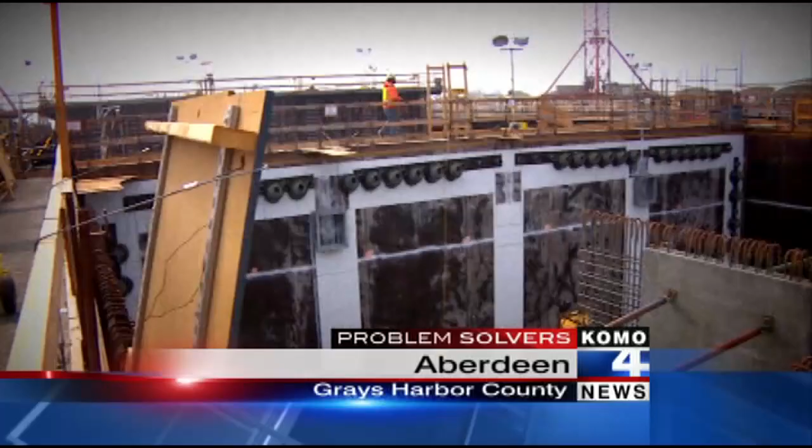Around the world, Western Washington is the acknowledged leader in building floating bridges, from Hood Canal to Interstate 90 to the 520 bridge.

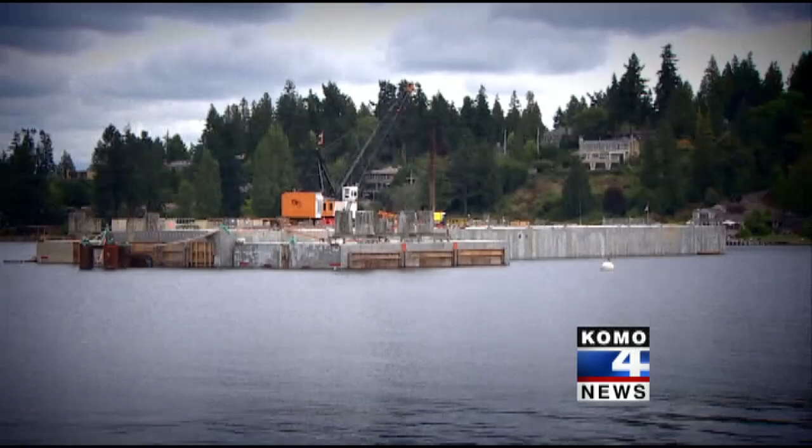And yet the problem solvers have uncovered construction flaws in every single one of the first 6 pontoons built in Aberdeen by Kiewit Construction for the new bridge.

In pontoon after pontoon after pontoon, we uncovered evidence of leaks in dozens of the interior compartments called cells.

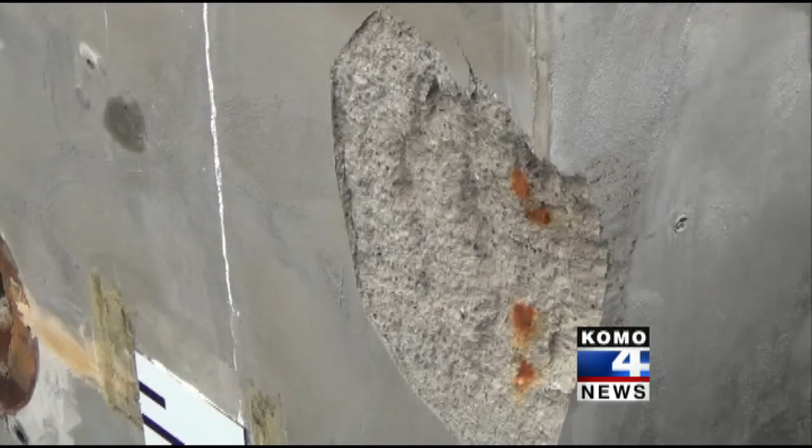The problem solvers uncovered documentation that all 6 of the first pontoons developed extensive cracks while concrete hardened or cured. This drawing, called crack mapping, is of the top and bottom slabs of one of the pontoons. Engineering reports found that the cracking appears to be similar in all 6 pontoons out of Aberdeen.

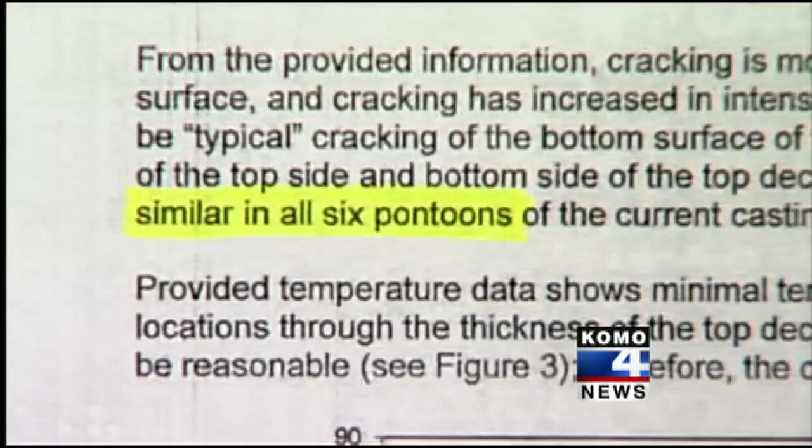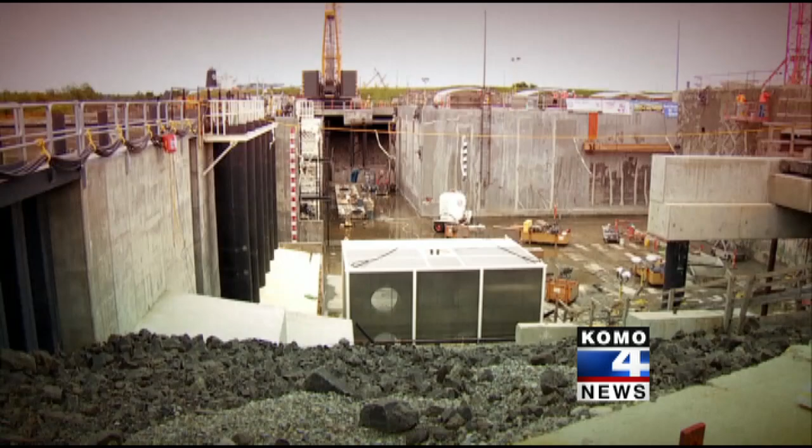John Reilly, the head of WashDOT's expert review panel: Is there any way to know if the cracking, the extensive cracking that we saw in the basin in Aberdeen, is part of why we're seeing the weeping in the lake now? Could be. Could be. It's the most logical connection.

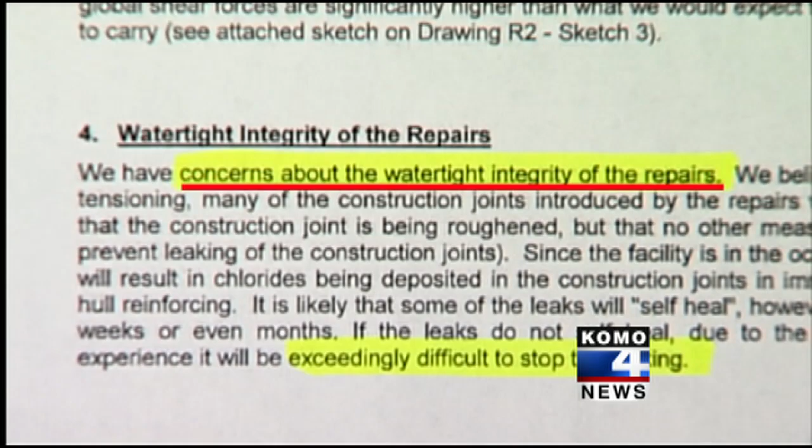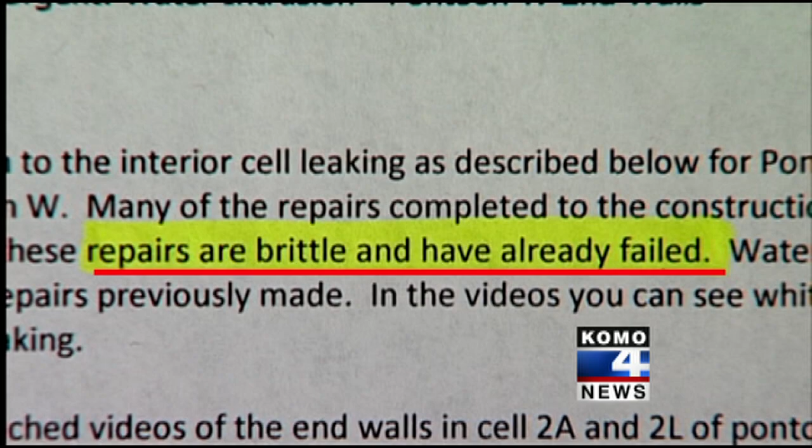A consultant's report in July raised concerns about whether the repairs could remain watertight. And by late August, internal WashDOT emails verified that many of the crack repairs are brittle and have already failed. If they're already leaking, that's troublesome.

State Representative Mike Armstrong is the ranking member for the House Transportation Committee. He's disturbed by what we uncovered and that WashDOT hasn't been more open. So we have to make sure that we have it fixed now before we start building these other, probably 30 pontoons. Both our insiders say the problems with these first pontoons already undermine the structural integrity of the new $4.6 billion bridge.

They point to the I-90 bridge, where one problem pontoon being rehabbed by contractors sank during a severe storm in 1990, pulling down several other bridge sections. Since then, annual inspections monitor cracks and leaks. In the most recent I-90 inspection, only 7 out of 2008 pontoon cells had measurable water inside, and those spans are 20 and 30 years old.

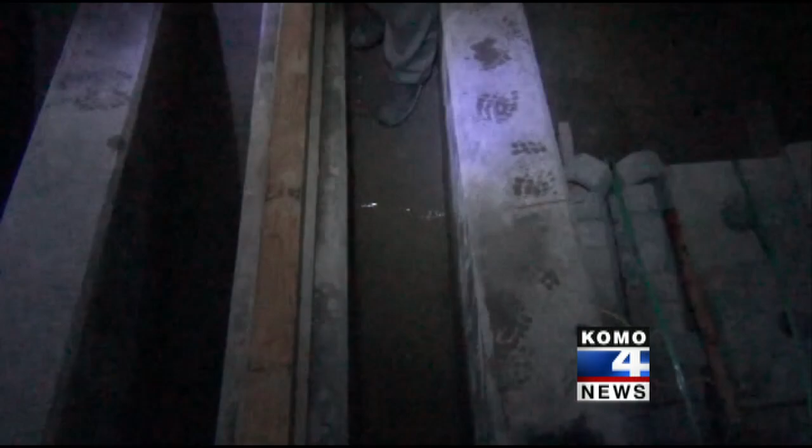The first 6 brand new pontoons for the 520 already have at least 36 cells that have leaked. WSDOT would not confirm how many pontoons have leaked, only saying: whether they are or aren't, we haven't accepted the pontoons, and we won't accept the pontoons until we know they meet the contract specifications.

Then there's the money. Insiders tell the problem solvers that late pontoons are costing taxpayers millions. The whole financial deal, with two independent contracts but one primary contractor, seems to favor that contractor, Kiewit, at the expense of taxpayers.

Two half racks of beer in there. You might remember Kiewit from our problem solver investigation last spring, where we caught their employees drinking on the job.

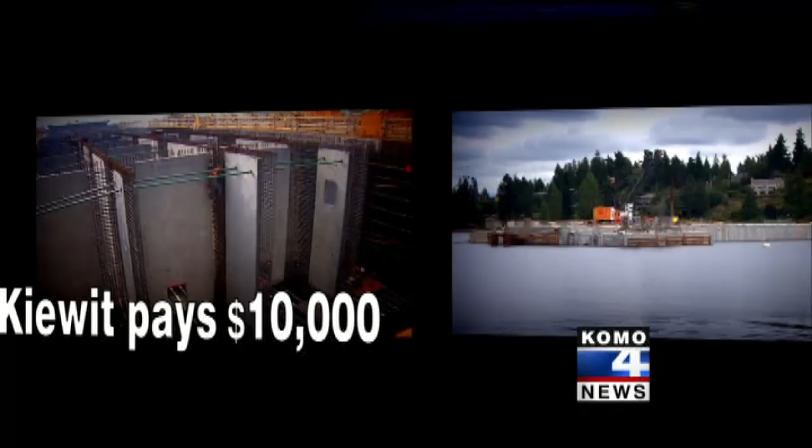Here's how the pontoon costs got so screwy. Every day Kiewit in Aberdeen is late with pontoons, they owe the state 10 grand. But that also makes the pontoons late getting to Lake Washington, and on that contract, the state has to pay Kiewit 100 grand a day. So every late day, parent company Kiewit makes an extra 90 grand, even though the problem started with Kiewit's other contract in Aberdeen.

Transportation Secretary Paula Hammond says the need to get the bridge built by their 2014 deadline dictated the terms of the contracts. We took a risk, and we took a very aggressive schedule in order to make sure that we can replace this bridge. WSDOT says it can't give us an estimate, but the records they gave the problem solvers show

74 days worth of delays and at least $2 million in repairs. That adds up to nearly $9 million to taxpayers. I'd like to know who came up with that plan, because that doesn't seem like a plan that's going to benefit the citizens of the state of Washington.

Secretary Hammond also just announced she's reorganizing oversight of the pontoon construction office with a new director at the Aberdeen plant, as well as moving engineering staff to headquarters in Olympia. Our sources tell me they believe that's an attempt to control information leaks to the problem solvers.

Tracy Vedder, KOMO 4 News.

I thank you for bringing everything to our attention. This is what Governor Gregoire is talking about. How deep is it?

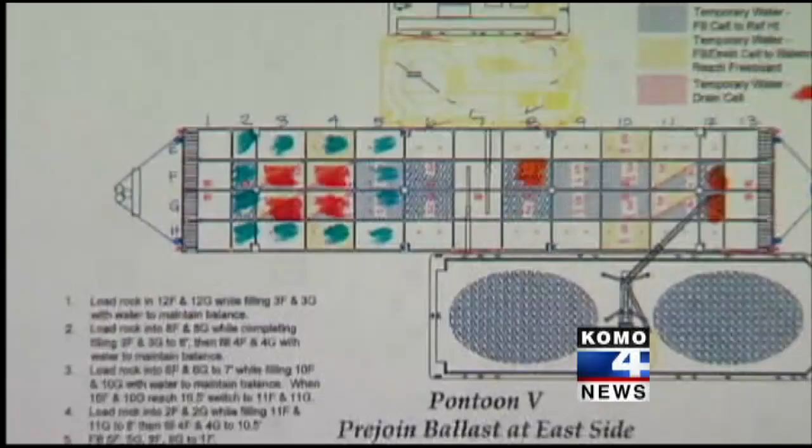Is that the only leak that you've identified? That is the only leak that we've identified. But new internal WSDOT documents obtained just today by the problem solvers diagram that leaking pontoon. It shows all of the internal compartments that are green, 12 of them total, are actually leaking. Other new documents and photos diagram the extensive networks of cracks as the massive concrete pontoons dried and hardened.

We also found that all 6 of those pontoons have leaks. I have made it clear, based on what I saw in your report, that I want another independent expert panel to review them. The state of these pontoons is also causing internal strife in WSDOT.

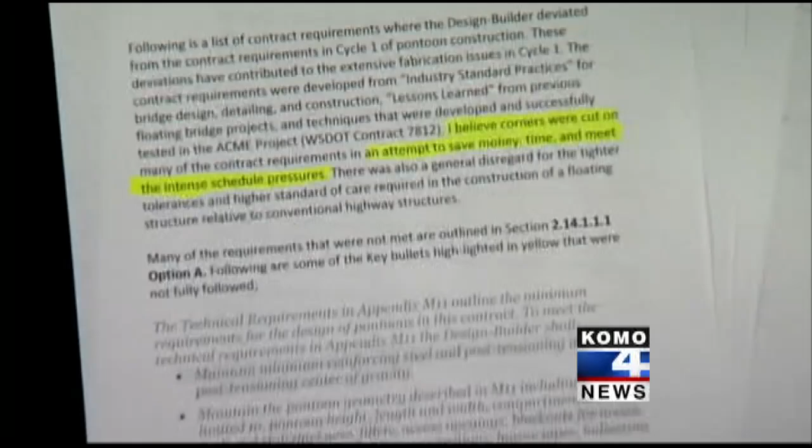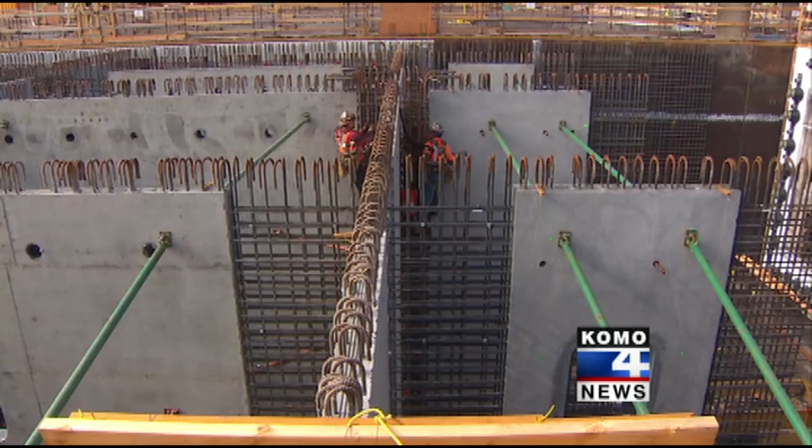In a detailed report, one engineer wrote he believes corners were cut in an attempt to save money, time, and meet intense schedule pressures. He asked to stay off the Aberdeen site, criticizing the contractor's repairs to the pontoons and writing they are taking a huge gamble with a critical public asset.

Governor Gregoire told me today that she wants the expert panel to decide whether or not the pontoons are safe. So I thank you for bringing everything to our attention. We are absolutely going to guarantee the public: one, transparency; two, safety; and three, protect the taxpayer's dollar.

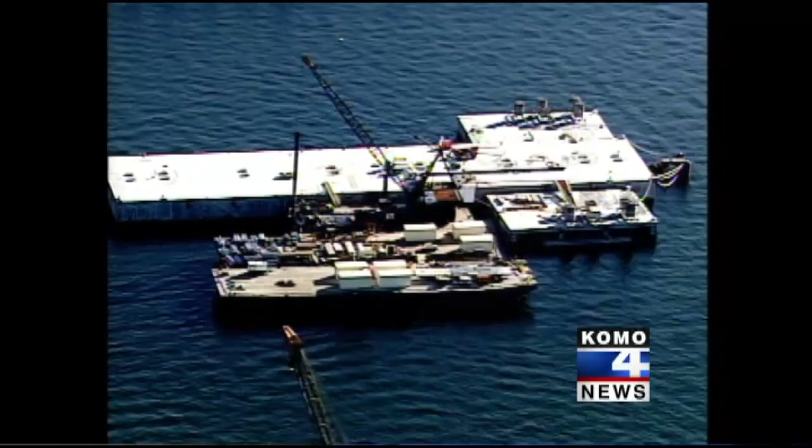Tracy Vedder, KOMO 4 Problem Solvers.

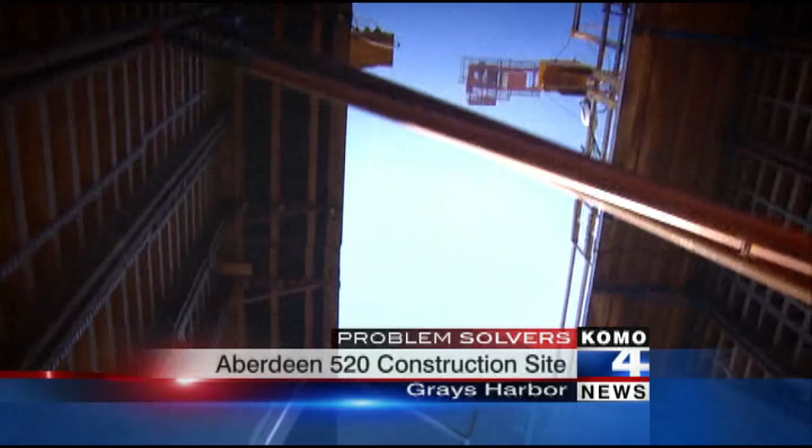To me, it's a disaster. It's a disaster waiting to happen. This man was an on-site quality inspector at Kiewit Construction's pontoon casting basin in Aberdeen last winter. He was there during construction of the first 6 massive concrete pontoons designed to hold up the new 520 bridge.

I won't drive across that bridge when they have it built. Why? Why would you drive across something that you know might fail? You know, it is a danger factor.

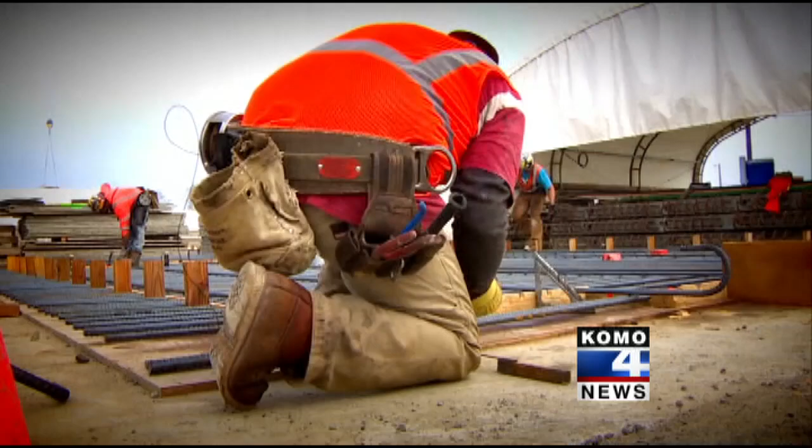The inspector, who asked for anonymity, was part of a quality assurance subcontractor team hired by contractor Kiewit to ensure correct pontoon construction. The QA, as it's called, is required by the State Department of Transportation's contract with Kiewit. He's been an inspector for 10 years. It's the worst I've been on for inferior work.

Our inspector confirmed what two expert insiders had previously told the problem solvers, that construction of the first pontoons was so shoddy it undermines the structural integrity and safety of the new 520 bridge.

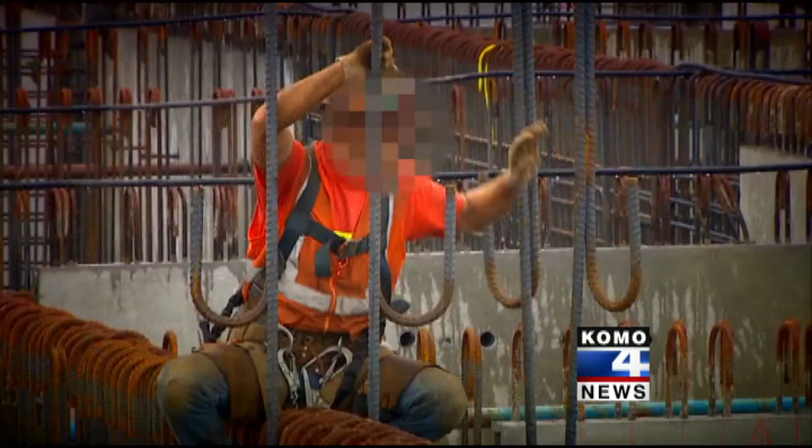Our inspector says every day he saw iron workers misplacing or using the wrong-sized rebar. That's the structural steel that provides the strength and framework for the pontoons. Rebar not having the correct clearances, rebar being out of place, bars being missing. It's not correct and it should not be signed off.

He says contractor Kiewit routinely poured massive walls of concrete to form the pontoons when conditions were either too wet—they pour in such heavy rains and standing water that the cement is literally being washed out of the concrete—or when conditions were too cold and the rebar was frozen.

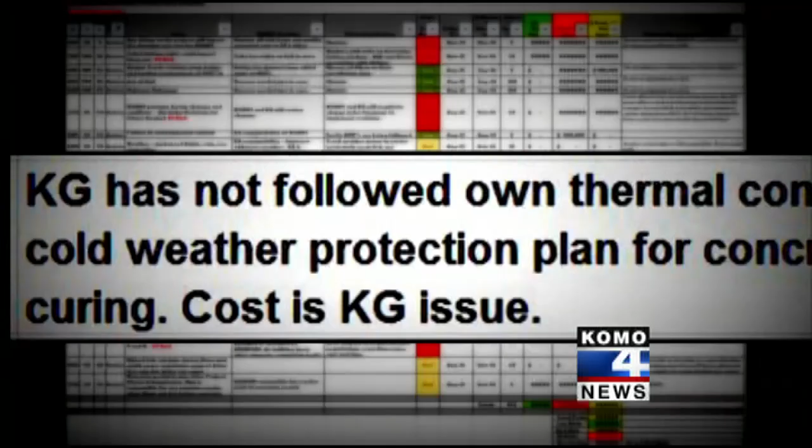It shocks the concrete, and there'll be a circumference around the rebar with weakened inferior concrete. A WashDOT internal document called a risk register even says concrete cracking in pontoons is an issue caused by Kiewit not following the plan for curing or hardening concrete, particularly during cold weather, and that it could potentially cost as much as $3 million.

Inspectors are supposed to write up such work in what's called non-compliance reports, or NCRs, but a few times I went to write non-compliances and I was actually reprimanded by my boss. The inspector says he was one of several inspectors ultimately laid off, not fired, and told it was at Kiewit's demand because he wouldn't sign off on inferior work.

I'm not going to put my name on something that might get somebody killed or hurt. That's just not going to happen.

We asked Kiewit and WashDOT about the inspector's allegations. WashDOT never answered us. Instead, by chance, we found a posting on WashDOT's webpage calling the inspector's allegations vague and referencing Kiewit's quality management plan. Kiewit spokesman Tom Jansen said only, 'While we take all claims very seriously, we cannot respond to vague, nonspecific, and unsubstantiated allegations.'

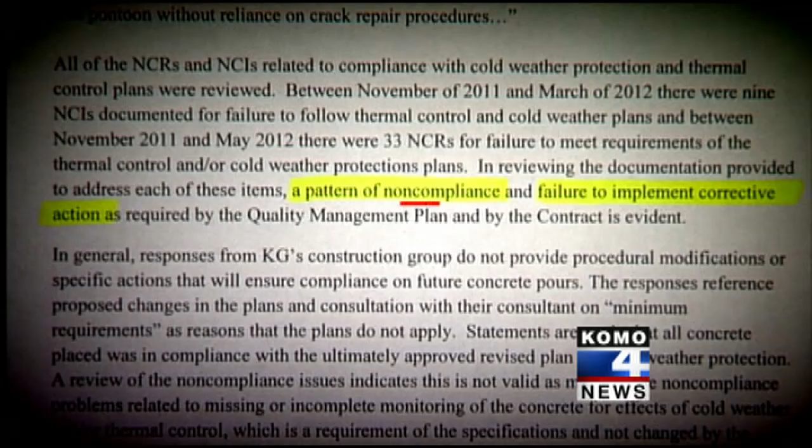However, many of the issues raised by the inspector are substantiated in a scathing internal audit produced by WashDOT's own engineers, which the problem solvers obtained through a public records request. That audit found a pattern of non-compliance and failure to implement corrective action on the part of Kiewit, and that WashDOT failed to hold the contractor accountable.

Kiewit is so big and powerful, WashDOT can't stand up to him. Kiewit actually pushes WashDOT around.

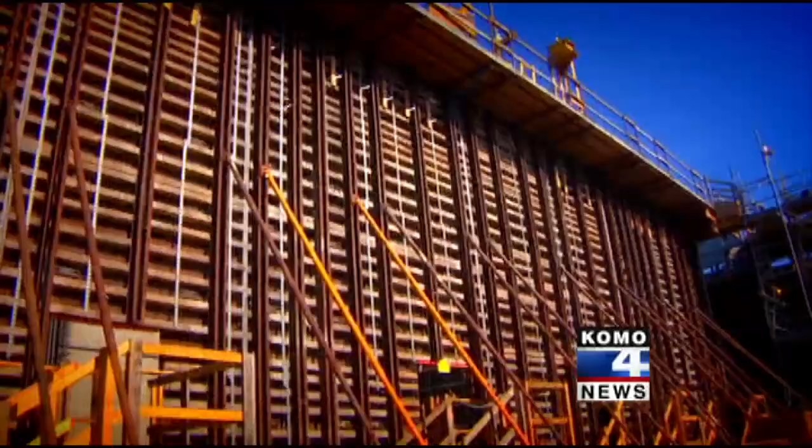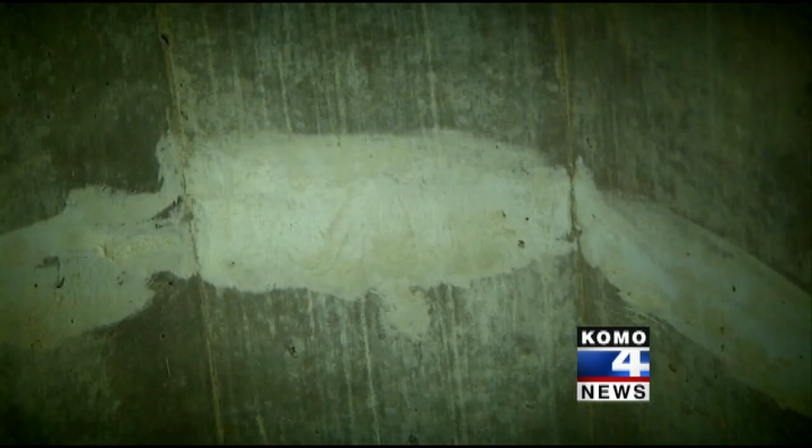The audit focused specifically on problems with concrete poured during cold weather and how concrete cured or hardened. Both affect how much the concrete will crack. According to these crack maps of the first pontoons, all 6 experienced significant cracking. Though WashDOT has undertaken several rounds of repairs of these pontoons, WashDOT confirmed last week that the 4 largest are still leaking. They plan to begin another round of repairs early next year.

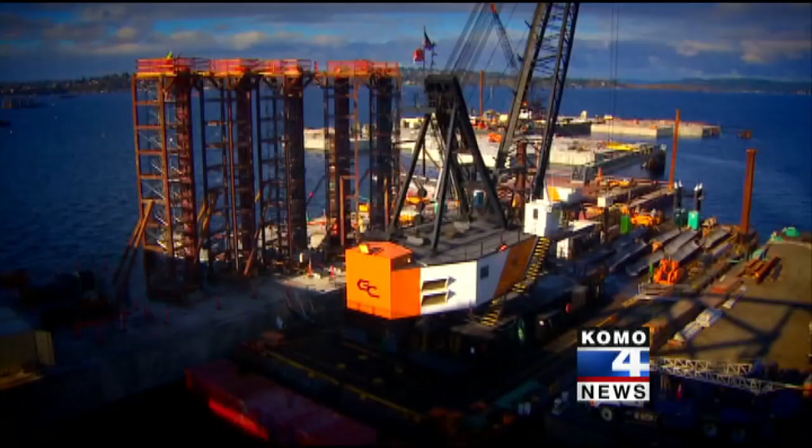In its online posting, WashDOT says KOMO needs to understand there is a rigorous quality program. But the audit cited that exact program, noting report after report after report—42 total—where Kiewit and WashDOT failed to follow plans to produce good concrete and failed to solve the recurring problems.

It's criminal in my book. Somebody up there needs to do a little jail time because they're stealing money from the taxpayers.

Governor Gregoire had directed the State Department of Transportation, WashDOT, to finish the new 520 floating bridge by 2014, because the existing structure could collapse in the event of a major earthquake or even a severe windstorm. Now, for the first time, WashDOT is saying it will not meet that schedule.

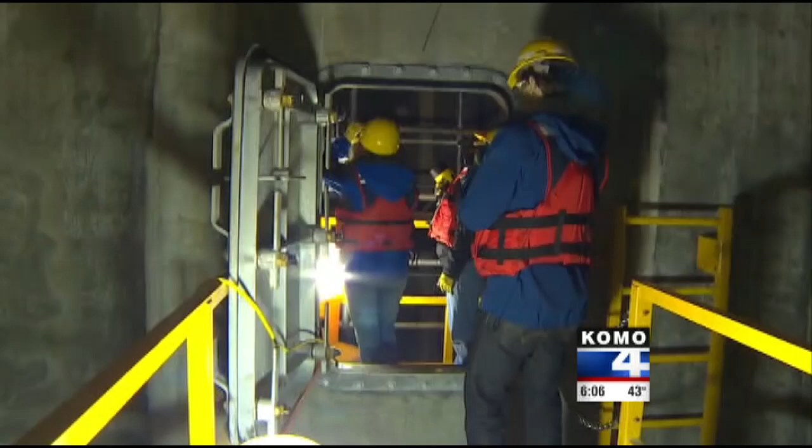WashDOT and contractor Kiewit are still trying to figure out a final fix for the first pontoons built for the Lake Washington Bridge. Divers have identified more than a dozen cracks underneath at least one of the pontoons, and they hope to begin repairs after the first of the year. But that, on top of pontoon construction problems last summer in Aberdeen, have slowed the project down.

Some of the issues that I'll talk about that we experienced this summer are making it a real challenge to complete the work by late 2014. During a bridge construction update for the State Transportation Commission, WashDOT for the first time acknowledged that the bridge won't be finished by the governor's 2014 deadline.

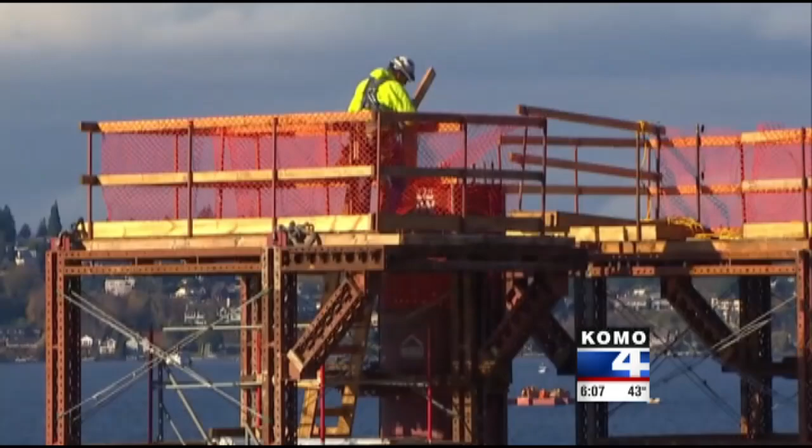A problem solver investigation revealed that all 6 of the first pontoons built in Aberdeen had leaks and were still leaking on Lake Washington. Internal WashDOT sources and a former quality inspector all raised questions about the ultimate integrity of the pontoons and ultimately the bridge itself.

To me, it's just a disaster. It's a disaster waiting to happen.

WashDOT says it is also still in negotiations with contractor Kiewit over who will ultimately pay for the cost of those pontoon repairs. Reporting live in Olympia, Tracy Vedder, KOMO 4 News.